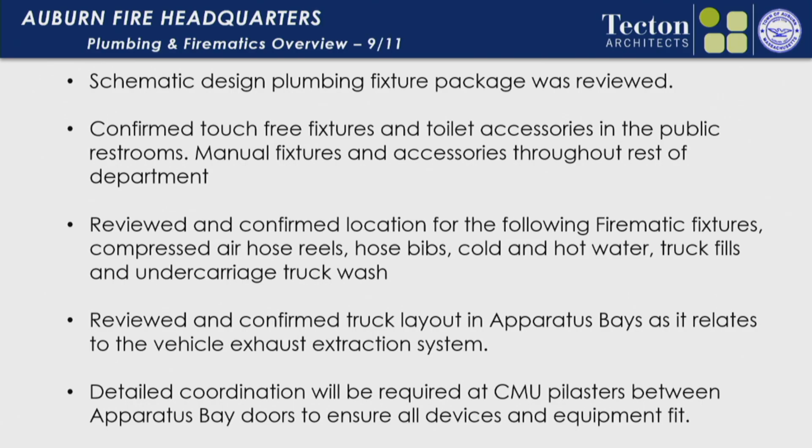We also went through all the different firematic fixtures: compressed air hose reels, hose bib locations, truck fills, undercarriage truck wash in one of the bays. We went through all those locations, exactly where we wanted them. There's been some additional review that you guys have taken in terms of the hose reels for the truck fills in particular, so you'll send us that information and we'll get that incorporated. One of the biggest reasons this is so important is that the apparatus bay has a lot of components in it. Each of the columns has the door rails for the door openers, but they also have lights associated with whether the apparatus can leave the bays.

They have truck fills that are needed in there. There's electrical sensors for the doors to operate for safety reasons. So that 2.5 foot, 3 foot wall gets a lot of installation on that.

Understanding what they need and what they want, and then coordinating it with all the disciplines is probably the biggest obstacle. And that's probably one of the biggest complaints, because what we end up doing is structural steel and ductwork are the two biggest items.

We've got Plymovent or MagneGrip, depending on what system we're going to go with, and that has to get in there. The way their trucks are actually set up in the apparatus, we spent a good hour and a half going through all of that.

And it was only our first touch. As they do their coordination drawings and actually start to show some of the interior elevations of some of those requirements, it's going to get tweaked again.

So each of these exercises is essential to make sure we're capturing all the level of detail we need for these drawings and specifications. It's amazing that the apparatus bays are like 9,200 square feet in this building, but everything lives in those pilasters between the doors, so it's very critical to make sure that gets coordinated properly.

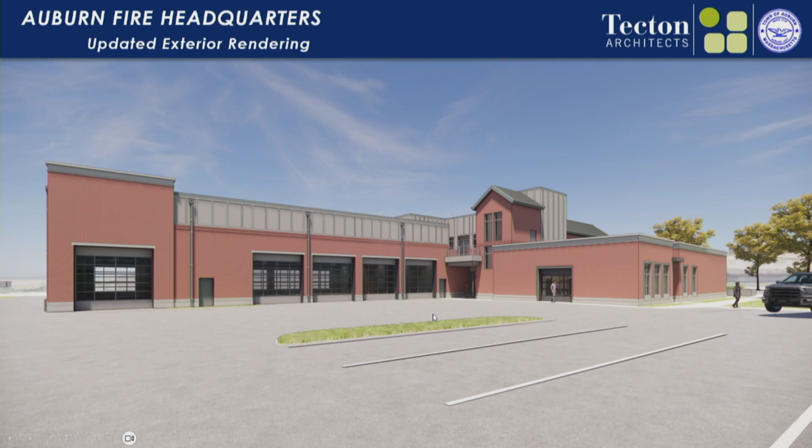One other thing we can show you is our actual live model. This is the Enscape model. We can send this to you, and you could drive around in it. So we can show you in real time, photoreal, what the entire building looks like as well.

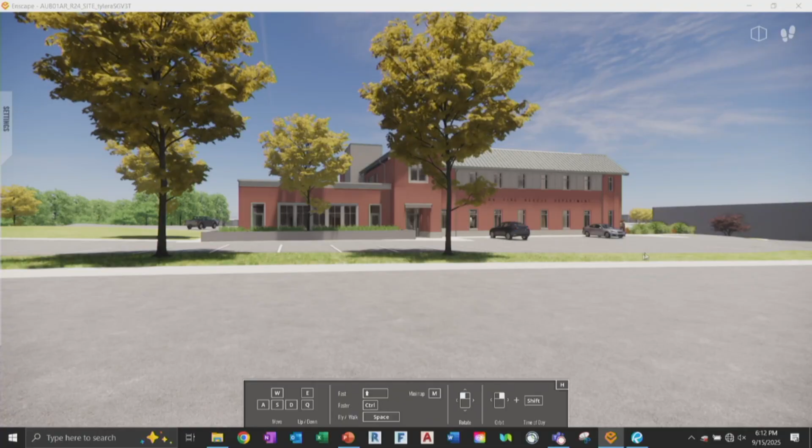One of the things is, when we talk about the next interior design presentation, we're working on getting all those finishes incorporated into the interior of the building, at the same level of detail, so the fire department can start to see how a lot of this comes together.

Matt, you're also working with the civil engineer and that group to work through some of the entranceways, the turning radiuses and paths. I think that was another meeting we all attended, just to iron out what made the most sense.

We, as a group, Tyler was here last week, and the committee had some conversation points and indications of what they'd like to see. I know your design team is going back to work through some of those differences, and we're going to present. Is that something we could expect over the next visit?

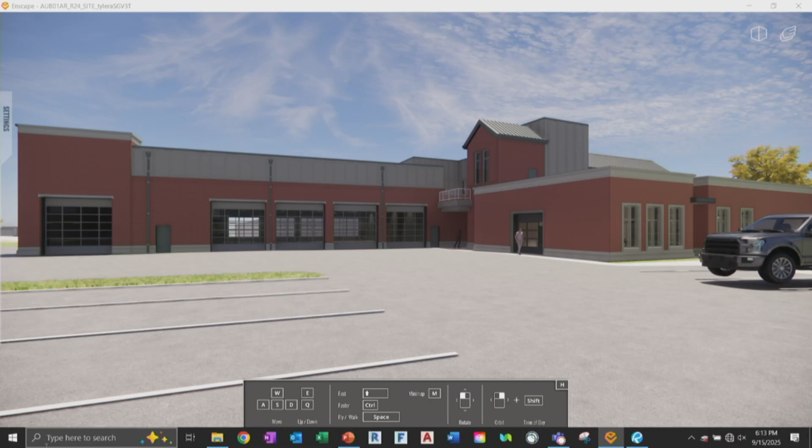You're talking about the floor plan changes? No, I'm talking about the exterior, the parking site lot plan, entranceway, road. Oh, that, yeah. So the site plan we submitted with the schematic design, the final schematic design package, has the changes incorporated. Okay, great. So I can pull that up.

I just want to make sure the committee saw some of the tweaks that were done to it, so you have a comfort level as we move forward. Before I move away from this, does anybody have any comments on the exterior?

I didn't mean to jump in. You just showed me the parking lot, and I just wanted to make sure. Yeah, no worries.

This rendering doesn't jive with your elevations in the schematic design estimate drawings. How so? Your stair tower and everything else just showing flat roofs and stuff back there.

This piece of it has been an ongoing area of development. So this is reflective of an item down a little bit further, where we squeezed the building a little bit tighter in a couple of areas, and part of that required some modifications to the stair tower to make it a little bit more efficient with some of the spacing.

So in the elevations you've seen in schematic, this extends all the way across, it's flat. Right, so yeah, that is one change here. What I'd note is this extension here is solely to get access to the upper roof line through the stair tower.

So there's a doorway and a ladder that gets down from there, point A, with a doorway out the other side to accommodate that. If it were me...

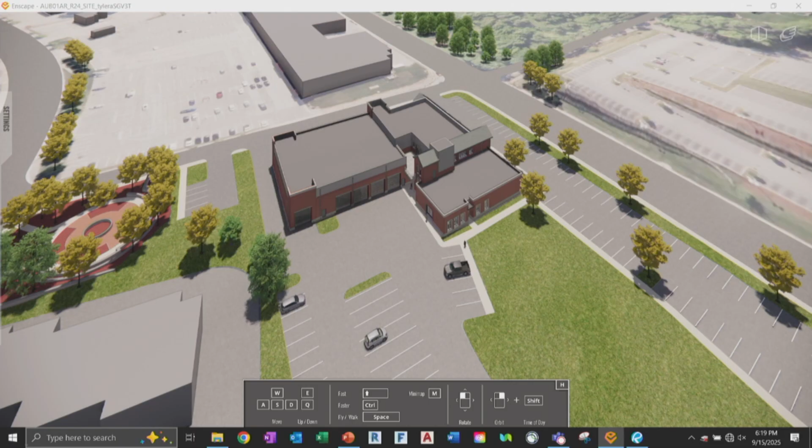Okay, that was good feedback. Which leads me to another spot I see for leaks is the West entrance into the EOC training room area. We have that little West entrance, right off here, the grass area there.

Where are you going? Oh, we just flipped it upside down. We're underground tunneling. We got a tunnel there.

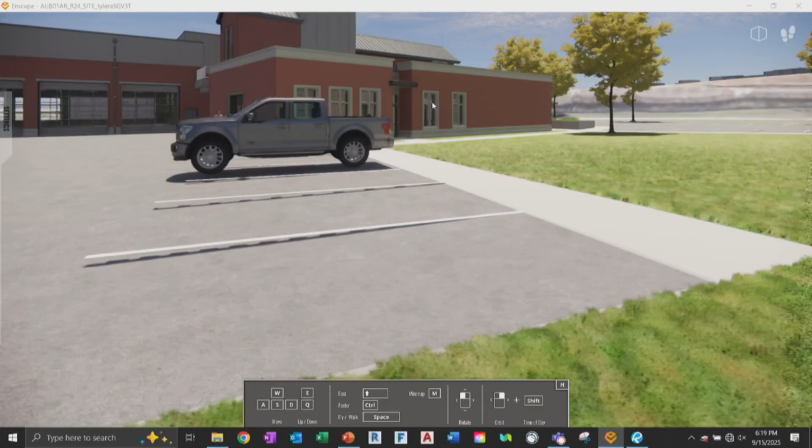Hold on, right here? You take the parapet all the way around, and it's just kind of like— oh yeah, just run it all the way across instead, run it straight across, and create a cut in. Architecturally, it makes sense, it's a big snowdrift area. It's going to get a lot of corners and stuff. Every corner's money.

If you went straight across, did you do that to put that little roof so they have a distinctive entrance? Is that what you did, Matt? I'm guessing they come out with a little bit of a canopy, and you can still have a vestibule door, recessed door. You just have to have it recessed back. Yeah, we can fill it in just above the canopy. Yeah, done.

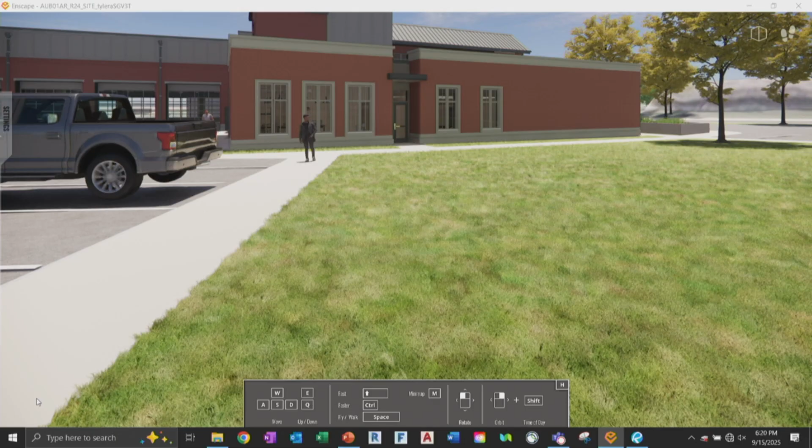Someone's watching and looking at the drawings. We're not done.

But this is the detail we want to catch, yeah, where we're at right now.

Your second floor areas, elevation wise, it calls out the basis design as metal panel, but they priced it up as Hardie board, and then gave us an alternate to go to metal panel. Yeah, they screwed that one up several times. They were also charging like $110 a square foot for HardiePlank, which is insane and unheard of. Well, they're also charging almost double brick for the metal panel, which is not right either. The brick should be higher than metal panel, material cost wise.

We see metal panel in the $100 square foot range quite a bit. Like the rain screens you're talking about? Yeah, really? Yeah, it's gone crazy.

Let's put brick up there then. No, we're looking at the long term, 50, 70 year building. Yeah, hardy panel, you're going to be up there painting and maintaining it. It lasts a pretty long time too, though. Well, I know, but you're going to have to paint it. You're going to have to do maintenance on it, not if you—

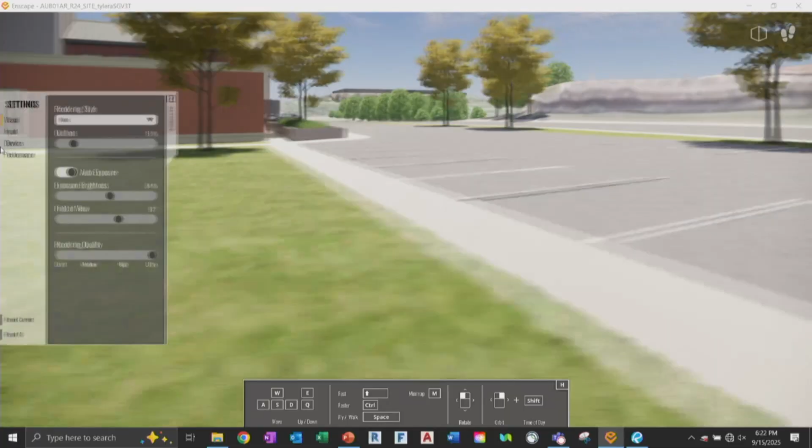Can you spin the building where he's talking about so I can see it? Please. I can't believe how well you guys keep the grass.

There, yeah, okay, it's there and it's on the other side. Yeah, the other side, I would assume it's above the—is that the same stuff? It's above the apparatus bays too, where you go gray. Yeah, pretty handsome building.

What do they say the life expectancy is on that panel versus brick, hardy plank or hardy board? Until you break it, yeah, like forever, right?

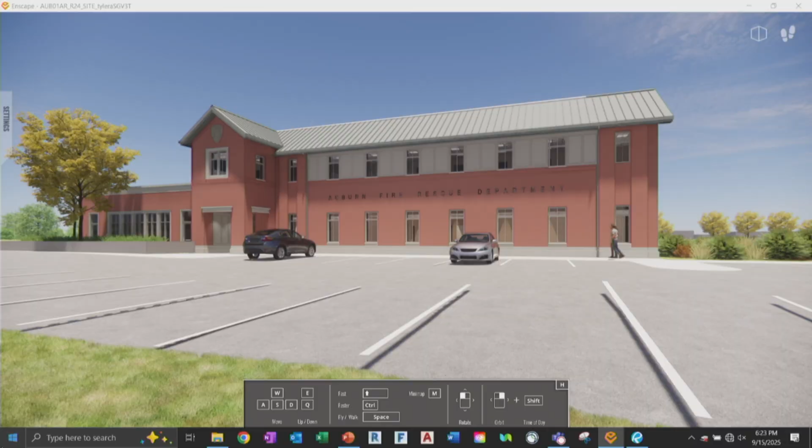99% of hardy plank issues are the installation of it. When a piece is cut, it's got to be primed on the edges, it's got to be mounted specifically. When it gets drilled, it's got to be sealed, because over time moisture gets into it and you'll see blistering. It's all on the installation, but the longevity of it is a long time. You can get away from the hardy board—the biggest thing that saves that is just the paint. The hardy board is rubbish, it bends in your hands, it's not that easy. No, paint is what holds that together.

And watching the town, maintenance is one of our largest items, so we want to go less maintenance.

I know everyone sells it as maintenance free, but it's not as maintenance free as everyone thinks. Nothing's maintenance free. And like you said, installation is also a very big key to that. It needs to be away from water, cuts up off of the roof, there's all these dimensions, and if it's not falling through right, you miss something and it's just going to be flashed, something we'll deal with later. That's why I was saying maybe there's an alternative material we can look at.

Can we see the garage side again, Matt? Front or back? The front, please.

Hardy plank was a solve, a one-all solve-all back in the day. Everyone was into it when it first came out, until they started really paying attention to it, until they had to replace it.

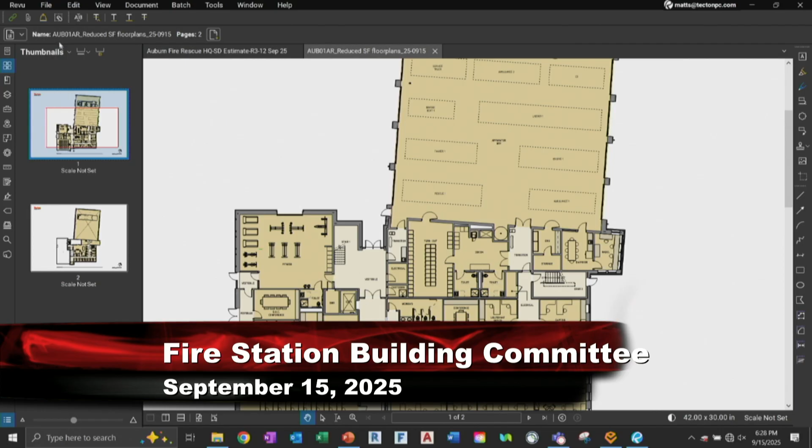You mean in front of the green space? How many actual EV spaces are we required to have? You just said 19 - operational? That's what he said, that's it. Not operational. That's what I'm saying. How many operational to start? None to start. And each pedestal, you can have 2 chargers off of them, so you could reduce - if you place them appropriately, 2 spaces could have 1 charger.

How is the electricity for those charging stations going to be monitored? Is the town just paying for whoever chooses to park there and charge it? If it's for department use, normally it's included, but if it's for anyone's use, people typically would pay. How would that occur? It's like, whoever the town uses, they have a credit card system - you have to set up an agreement as a company, you bring data out there, and they have a credit card system. Typically towns will have a vendor.

Vendor that they typically use for town hall parking or whatever is around town. Not free, nothing's free. So right now they're along there.

So when you go to start putting pedestals in, it can be right out the front door, versus if you went to the back side of the parking lot down here. No, even to the other side, just up closer to the building, right there, like to the left.

We got close to 19. Yeah, we could do that. We need to have some here. I think ADA, there's one over there in the handicap spots. Right, that makes sense. And then there's one over in the space for the

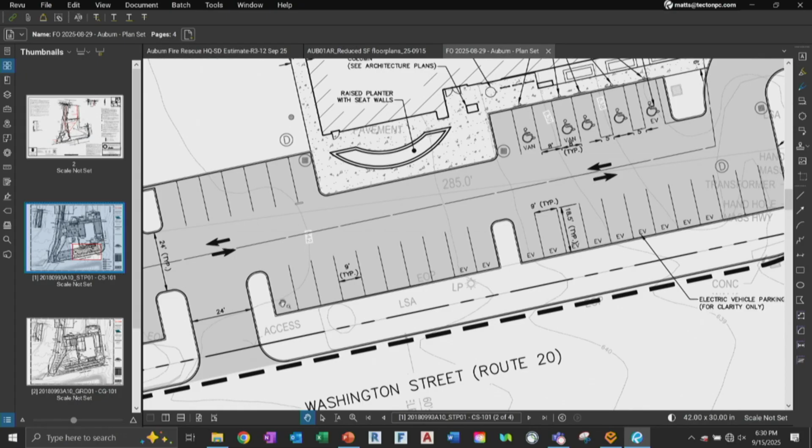Would that get in the way of the expansion if we put them against that green space? It shouldn't, because if you go up on the training room, it shouldn't affect it.

No, we're talking about the police station, the empty grass area after. Well, you know, there's gonna be disruption no matter what if you put another building there, so.

That could be 10 or 20 years from now. We don't know who knows what's going to be happening at that point. At least, right?

They won't have vehicles on the road, they'll be flying around. It'll be like your phone, you drive up over it and it's wireless charging. They have those now, there's a company that makes them. You can buy a little adapter that goes under your car, it's crazy.

I mean, I suppose you could put them on the Route 20 side of that.

So do you want to talk, while you have these out, about your access points and your travel corridors?

He actually redid that entrance there. I noticed that was the one you were asking about. Yep. Since we had the plan up, that's why I was asking, that's all.

When you guys spoke with MassDOT on this, were they good with it? Yeah, they were good, they want the plans right away. The biggest thing is the entrance to the parking lot, the setback from that corner. Our concern is that MassDOT is going to look at this like, oh, a new project is happening. We hated that intersection to begin with, we don't want them to do that anymore.

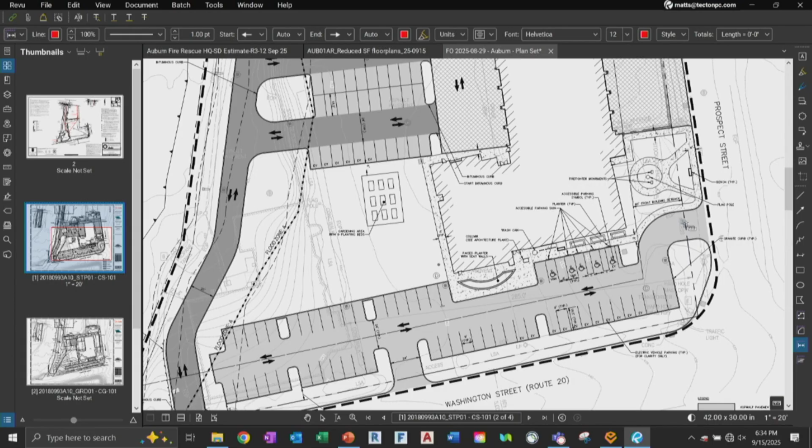While you get that tool out, can you just check how wide the entrance is there, pulling in off Prospect, right here, just across? Yeah, I think the mouth is wider. So you're saying it's funneling? It's an optical illusion - it's effectively the same.

They're gonna be right turn only. Not good - I would think that would be left or right out of there. That should be fun. The whole reason for that was to keep people off Route 20, wasn't it? So we can't really restrict a left-hand turn. Take a left coming out of there - it basically creates 2 lanes as of now. When you get closer to that light and it backs up, then you're gonna try to take a left out of there.

But it's no different than when Chuck's was there. Yeah, DOT, when we met with them, said none of that intersection meets today's standard right now - none of it does. So they said if it gets touched, it has to be all brought up to whatever their standard is. On our dime? Not on our dime, right? I don't want it on our dime. Who's gonna bring that up, whose dime is it for that?

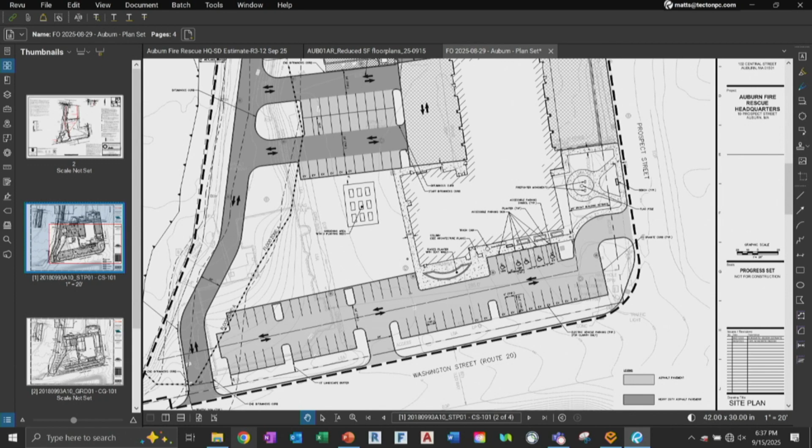Can you scroll just down a little bit more? I want to see the entrance going up, the pass through the other way. Which way, down? So there's the entrance going in on the back loop. How do you transition to the outside, the very top? It just connects to the existing curb cut. They were concerned because it's the property of the adjacent owner, so they wanted it tweaked a little bit so that you had the radiuses. We are maxing out what we can touch there because we're right up against the property line and against the wetland. The curb cut that's up here, what's there is what's going to be there - we can't make it any bigger.

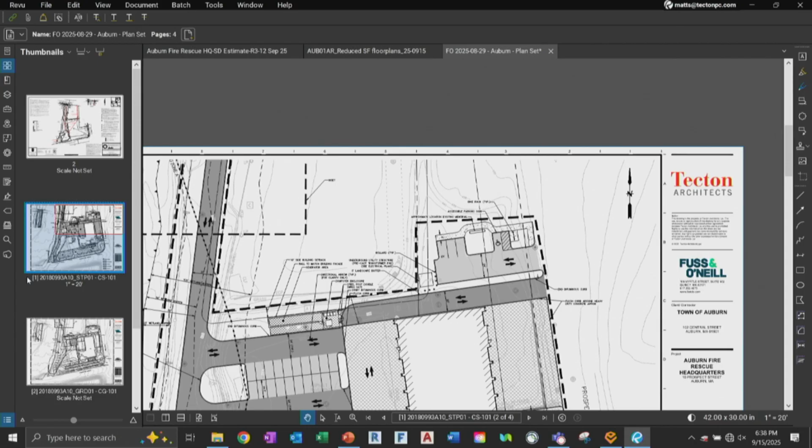That was DOT's request, they wanted to see that changed a little bit, to make it bigger. They want to see it changed because some of it's on somebody else's land. Isn't Herb Chambers on that to the left? Yeah, they do, someone like that. It's a new place now, scroll over, new company. The Herb Chambers sold all those.

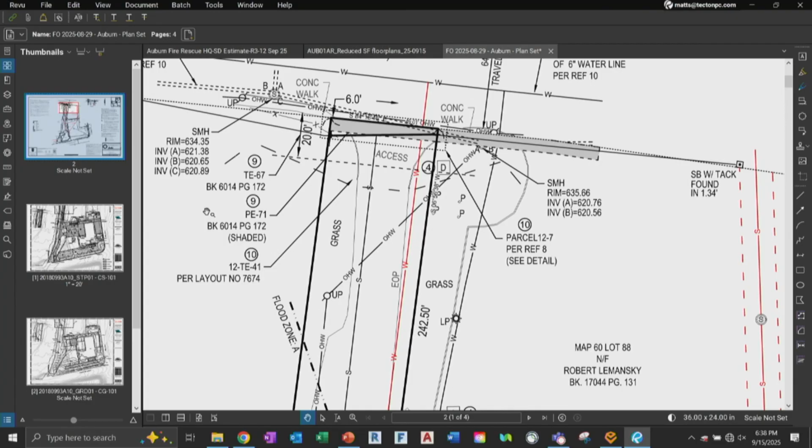Yeah, I know they sold. DOT had mentioned that during our meeting, that they were being sold. So they wanted to soften that, but move it so it wasn't hitting Herb Chambers in that left corner, just a little bit. Looks like they tweaked it.

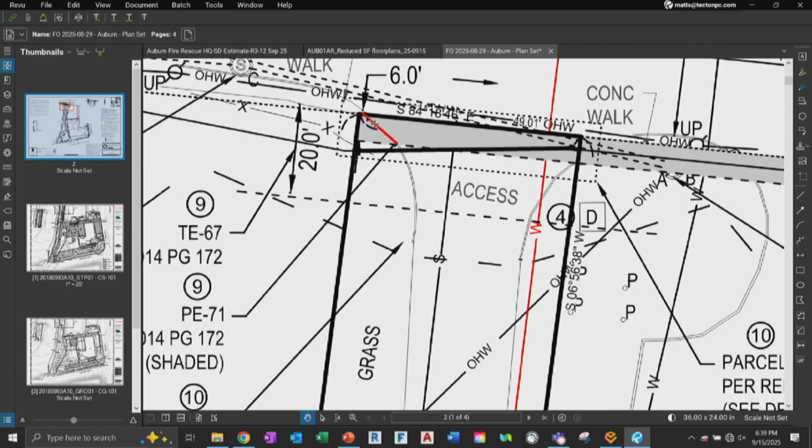Wait, where's the existing? Go back up. So is that black line the traffic? If you follow it, I don't know why this is covered with a black box, but this basically meets right there at the street, and the edge of this is the edge of the property line. Maybe it just needed a little moving. That looks much better than the plan was previously looking.

That's not the original though. Was there? Do you have the original? This is the survey. So this is the existing.

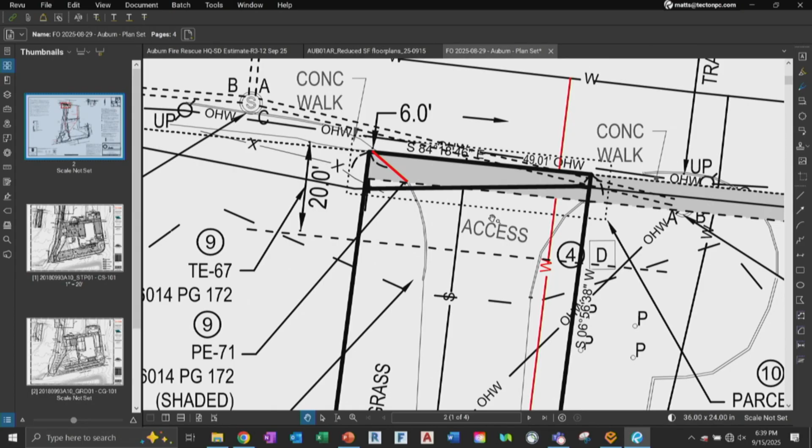It might have looked worse too, because it was all grown in. Still grown, yeah, when we looked at it that day. Maybe. And what about the retaining wall, did you guys have to do something? We were cutting it back to the property line.

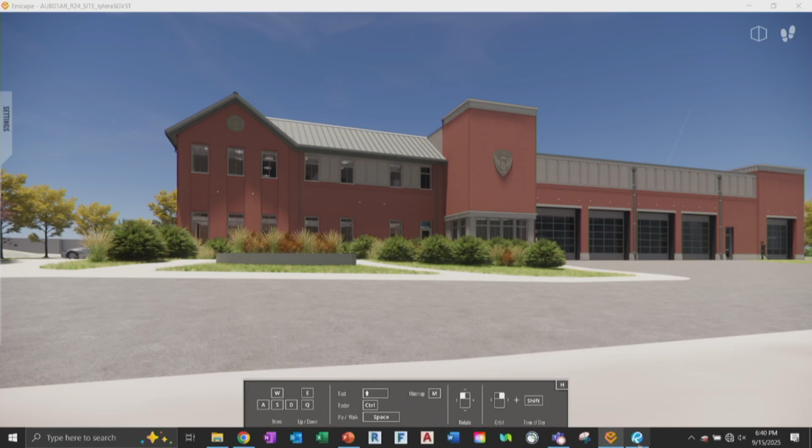Any other questions? So is there a wall or no? We were able to get away with no wall. We had talked about needing a retaining wall in that back corner when we had our first civil meeting, where their parking is, he's saying. Right, Sean? Yeah.

Firefighters have... no, we're trying to make it work where we don't need one. Yeah, that'd be ideal. I do have an item to discuss tonight that might help improve that a little bit, a little upfront cost that might save us down-the-road cost. So I guess I'll bring it up now.

So this line here doesn't align to anything. That's the floodplain. This is a random line that was generated in FEMA, who knows how long ago, by who. That's a floodplain line. Flood water follows topography. This is our topography, right here. Why would water go that high then?

One of the issues is we have correspondence from the previous owner that in the 40 or 50 years they've owned the building, the site's never flooded. We have records of flooding 5 or 6 feet down in elevation from our lowest elevation on site, 3 properties away, that has flooded. So we have high confidence that we're probably not in the floodplain here, according to what this line indicates.

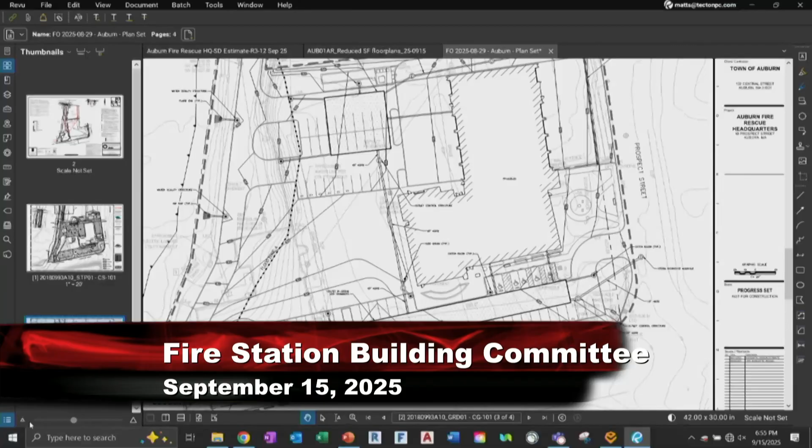Unless there's more on the site plans or the building itself that people have questions about from the drawings. Matt, I just have one on the parking lot plan. I noticed the parking area dead ends before it hits that access road - is that on purpose? I'm just thinking about snow removal and maintenance. Ideally you want all your visitors to stay within those spaces, but I can see hosting a Chiefs conference and needing to get additional people out to the back.

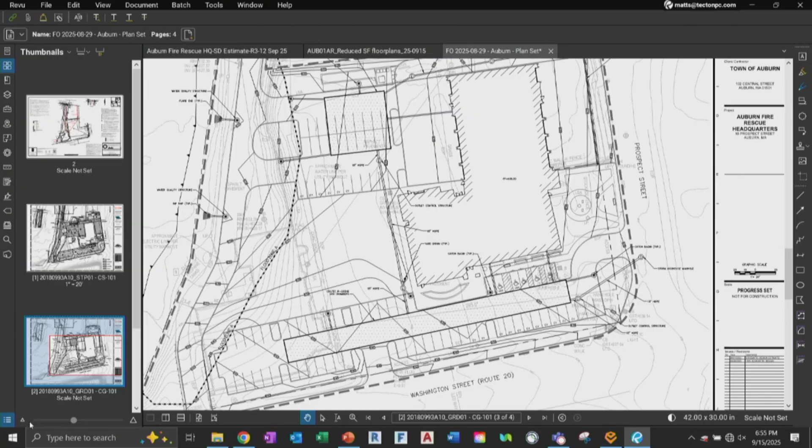I know you want to restrict that road at the fire department's request to have that blocked. Not like a gate - we're trying to keep people off that back road. How are you going to block the access road in general? Are you going to have that gate armed somehow? We're still talking that through. Some of the plans we liked were too costly, so we're reevaluating.

Okay, interns - you're just going to have an intern stand out there.

All right, so we'll jump right into the estimate. Just an overview - if there's anything we want to look at specifically, I have the PDF of the estimate.

The initial construction budget from the May appropriation was $24,800,000. I wanted to outline that we had $1.2 million in contingency, another $1 million in tariff contingency, for a total construction budget of $27 million. Where we are with the estimate is we're at 27,916, exclusive of the contingencies. So it's about a $3 million delta right now that we're seeing.

I'll caveat that a number of ways. One, this is schematic design, and the estimate at this phase is very hypothetical and uses a lot of assumptions. That's what took us the past couple of weeks to get you the estimate - we're correcting as many of those assumptions as we can. That doesn't mean we got them all; there's still a lot in there, a lot of site development and detail to go through. The estimators on every project are being a lot more conservative at the schematic design phase.

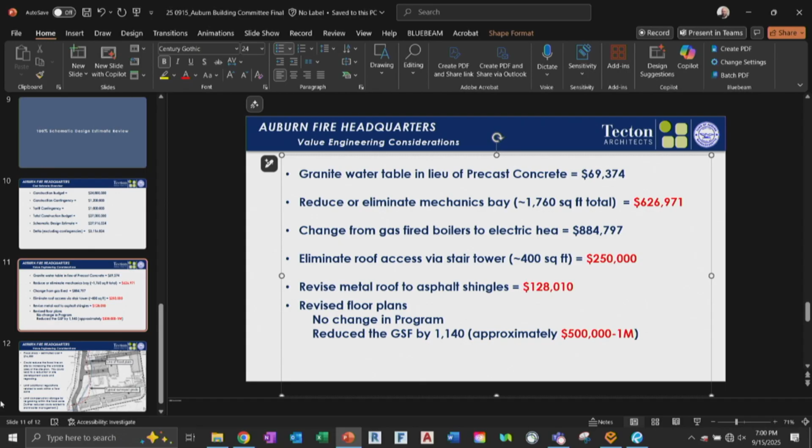That one's written backwards, so let me clarify - it's the elimination of the heat pumps, not the addition. Right now we don't have heat pumps, we have gas-fired boilers. To go to heat pumps, it's an $880,000 add. Huge add. So it's gas, or about $1 million more for propane - it's got to be propane.

Yep, on-site propane. We talked about eliminating that stair access on the roof. So there's about $250,000 tied up in that. We could reduce, we could get $128,000 by going to asphalt shingles for the pitched roofs instead of standing seam metal. It's not worth it - if it were $500,000, I'd be talking to you about it, but to me that's not enough.

One thing we did do is we put the squeeze on the floor plan one more time. So we got a little more than 5% out of the floor plan by making a couple of changes. I can walk you through those plan revisions, but we reduced the gross square footage of the entire building by another 1,140 square feet. So that's anywhere between $500,000 to $1 million right off the top in net reduction in cost.

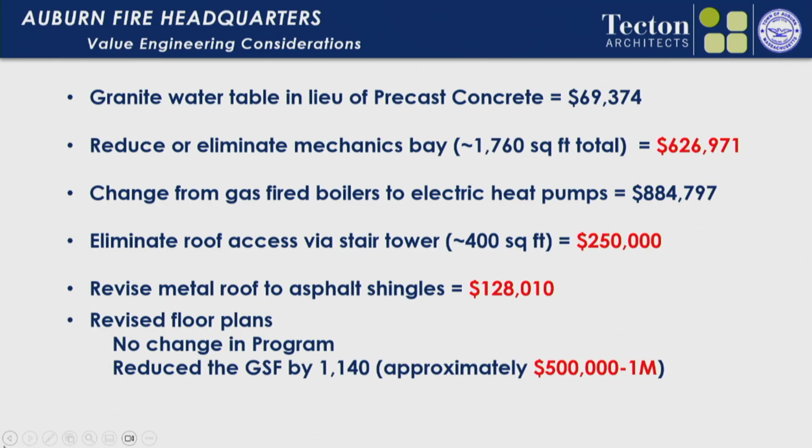From the estimate? Yes. Oh, so we're still over? Way over, still, yeah, but not as much.

Well, if you eliminated the mechanics bay, could that be done at Drury Square? But it wouldn't be as efficient because you're spread apart - no, you can't, it's not high enough, you can't lift the trucks there. Oh, at Drury Square you don't have the height. Okay, so that takes it off the table.

So before you make any drastic changes to these plans right now, you are at schematic design. I think the other big thing that's not even here is to take the entire backside and reduce your materials. You've got brick all the way around the whole building, and that's a lot of brick back there. We could reduce it down to panels, or something, whatever it might be.

Well, the middle school lobby, the main lobby in there is all epoxy terrazzo. We got $73,000 worth of terrazzo, with the logo and stuff, and another $16,000 in the base. The quartz tile that we were recommending is an alternate. QT1, $15 a square foot versus 55, so a significant difference, 40. You'd save $40,000 if we went to the quartz tile. Sounds good to me.

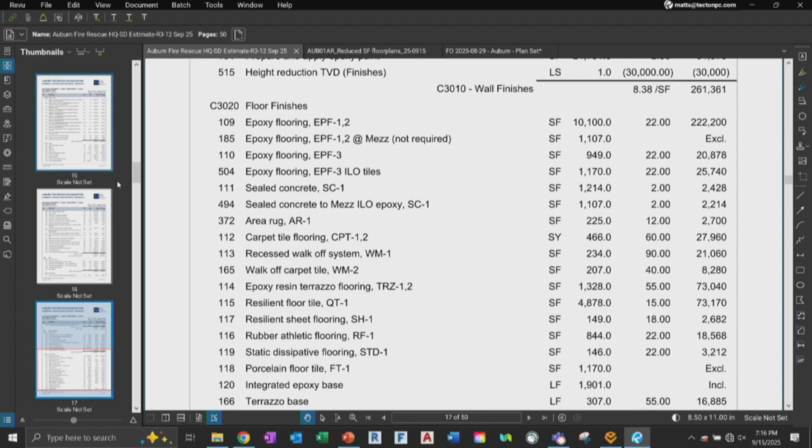So these are all topics that we're going to hold accountable and just keep tracking. This isn't unheard of, to go through your first pass and have the estimate be high at this level. If it's like this at DD, then I start to sweat.

So DD is what you're going to have drawings done. What, early December? In another month or so. You got a month? I wanted to bring up one other item I had.

Oh, the acoustic deck stuff in the partitions. Where was that? Number 8 and 9. So the acoustic deck, that's looking at doing an acoustic metal deck in the apparatus bays.

For those who don't know, it's basically the metal deck they make the roof or floor out of. It's got perforations in it. You put insulation up there, which reduces a little bit of echoing and things like that. The acoustic folding partition in the training room divides the training room into 2 separate rooms. It's another $100,000 for that.

Where were you saying the acoustic deck was going? Apparatus bays, in the apparatus ceiling, where they do the acoustical metal panel with insulation. It takes away some of the sound. I was surprised a couple of these fire stations didn't have any acoustic treatment.

Northbridge did, they sprayed on almost like a textured material. K-13. That deadened the sound in there. We did the acoustic deck in Lexington at their headquarters. I've also done them without the acoustic deck, and it does just fine.